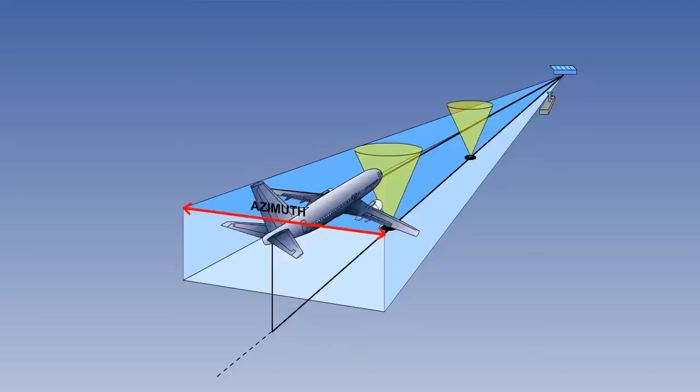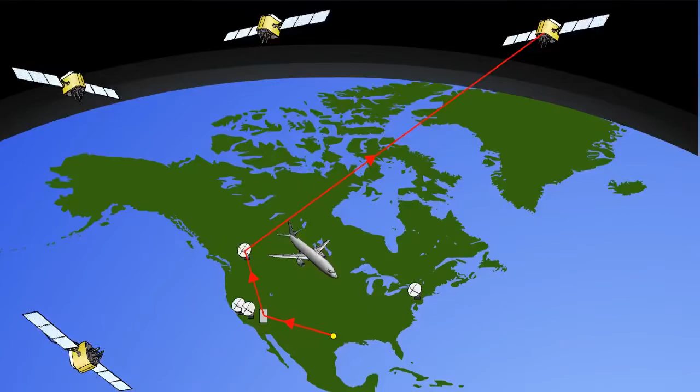The Instrument Landing System, which we will call the ILS, has been in existence since the 1940s, but it is still the most accurate approach and landing aid used regularly by airliners. However, GPS systems, supplemented by ground equipment called Local Area Augmentation Systems, are in advanced stages of research, and no doubt they will be available generally within 10 years. In addition, microwave landing systems avoid many of the problems with ILS.

But our concern in this lesson is the ILS, which provides pilots with an accurate means of carrying out a precision instrument approach to a runway, giving guidance both in the horizontal plane, azimuth, and in the vertical plane, the glide slope.

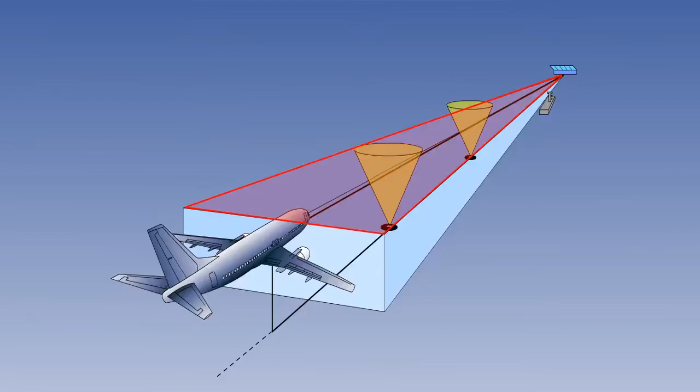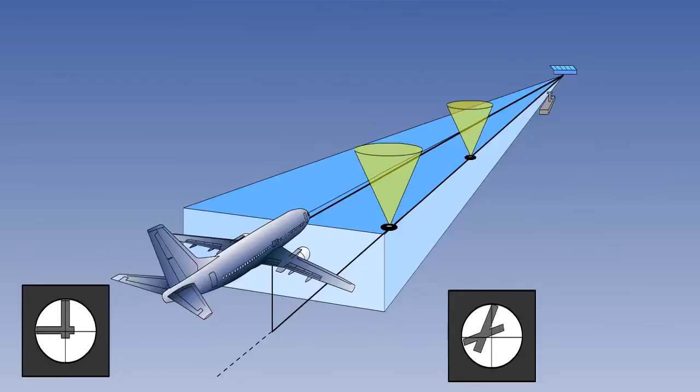The ILS provides the pilot with visual instructions in the cockpit to enable him to fly the aircraft down a predetermined glide slope and extended runway centerline, the localizer, to his decision height or decision altitude. At decision height or decision altitude, the pilot decides to land if he has the required visual references. If he does not, he goes around or overshoots and follows the published missed approach procedure.

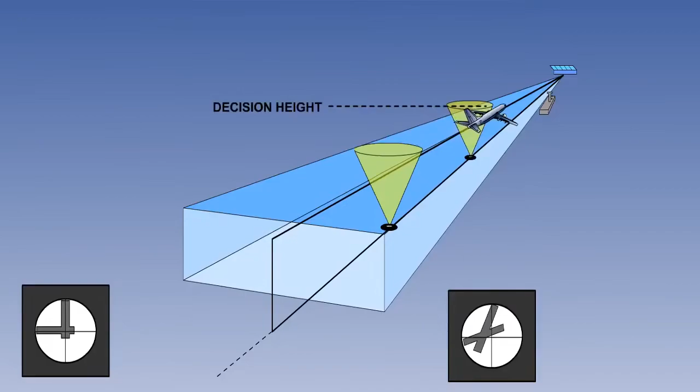There are 3 parts to the ground installation, the first of which is the localizer antenna. This transmits in the VHF band and is located on the extended centerline of the runway at the upwind end. Its signal provides the extended centerline, the localizer, to the approach side of the runway.

The second part is the glide slope antenna, which transmits in the UHF range and is frequency paired with the localizer. It is located about 300 meters in from the threshold and about 120 meters from the runway edge abeam the touchdown point. It consists of 2 rectangular transmitters on a mast. It provides a descent plane at a predetermined angle to the horizontal, normally 3 degrees, according to ICAO. When combined with the localizer, this provides a precise path to fly to the touchdown point.

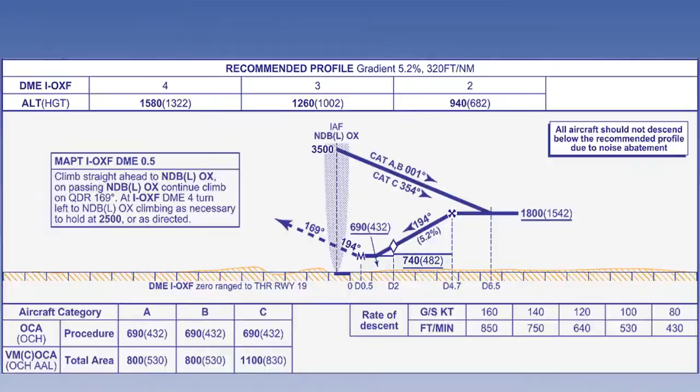The third element of the ILS is a series of 2 or 3 marker beacons on the approach side of the runway. They are designed to give the pilot a cross-check of height against range as he crosses over them during his approach. The distance is shown on the approach plate.

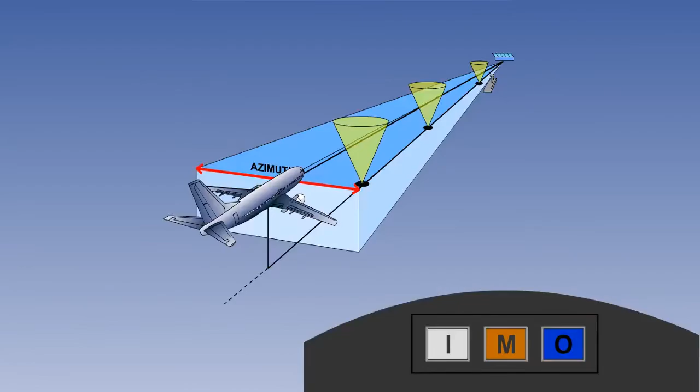Each beacon triggers a different coloured light and audio signal in the cockpit as the aircraft passes over. The outer marker light is blue with 2 dashes per second and denotes a distance of between 11.1 to 6.5 kilometers from the touchdown point.

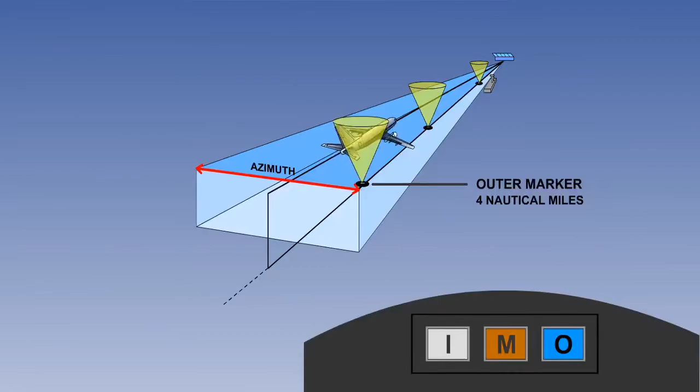The middle marker is amber with alternate dots and dashes at the rate of 3 characters a second and denotes a distance of about 1,050 meters. The inner marker is white with 6 dots a second and denotes between 450 and 75 meters.

Here we see the complete picture.

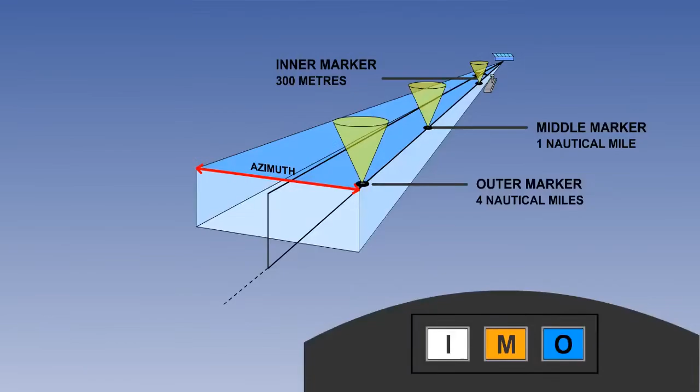Different patterns of transmission are emitted by the markers, so the pilot can tell the difference. They are not directional aids in any way and transmit at 75 MHz, modulated by 400 Hz in the outer marker, 1300 Hz by the middle marker, and 3000 Hz by the inner marker.

These beacons have frequently been replaced by distance measuring equipment, DME, which provides continuing distance readout for the pilot. However, the DME is protected from interference only within the localizer service area of 25 miles and up to 25,000 feet.

When DME equipment is available, it is frequency paired with a localizer when the DME distance is 0 reference to the threshold. It is also used as part of the published departure and arrival procedures, SIDS and STARS, to specify where a maneuver, such as a descent, is to start.

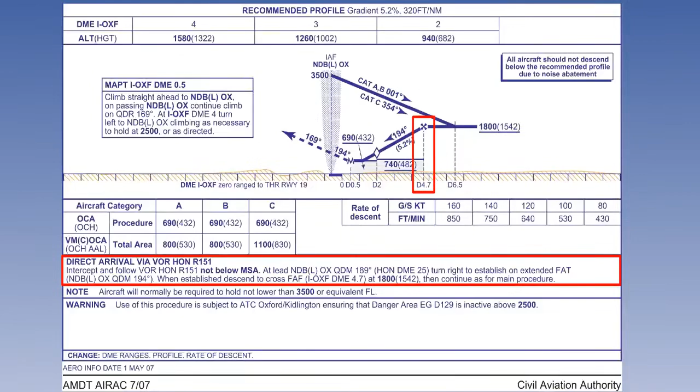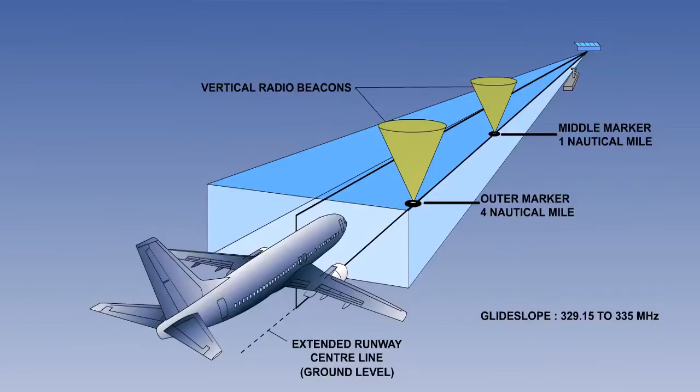Glide slope frequencies are in the UHF band, between 329.15 and 335 MHz, and also provide 40 channels, which are paired with the localizer. This means that the pilot only has to tune to the localizer frequency to also get the glide slope transmission. This saves work and avoids errors. The DME transmission is also frequency paired with the localizer.

The ILS must be identified before use. The ident on the localizer transmission is a 2- or 3-letter group, transmitted at 7 groups a minute, prefixed by the letter I, such as IOXF for Oxford ILS.

Airfields with an ILS are shown on charts and plates with a long paper dart-shaped symbol, and the frequency is shown. Here we see Oxford ILS on 108.35 MHz.

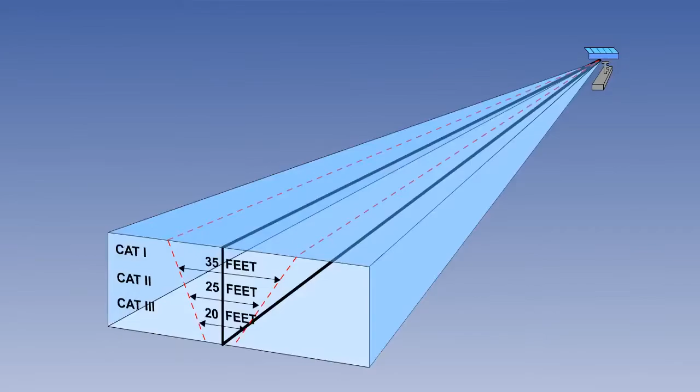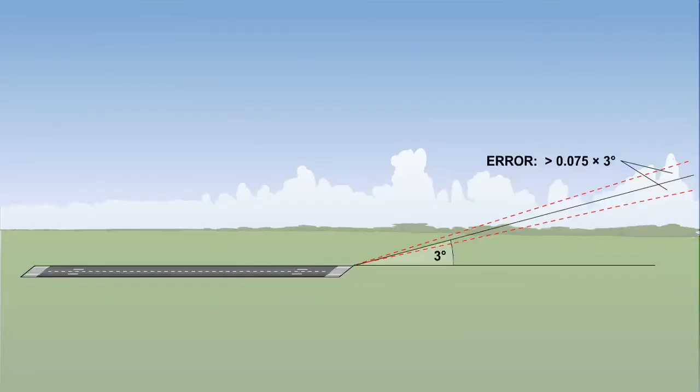If the glide path angle changes by more than 0.075 times the basic glide path angle, or if the power output falls by more than half.

If the ILS becomes unserviceable, the ident is withdrawn. If it is undergoing maintenance or testing, the ident will be withdrawn or replaced by a continuous tone.

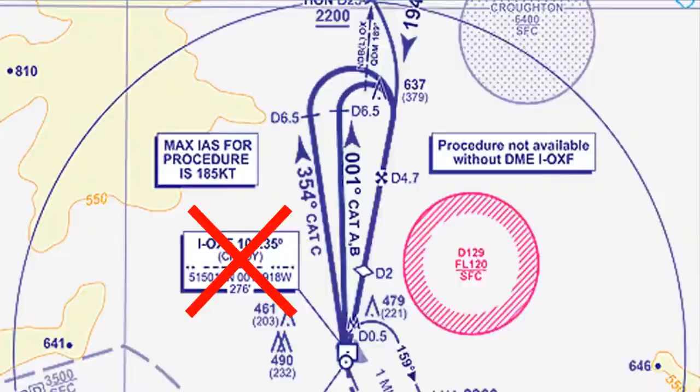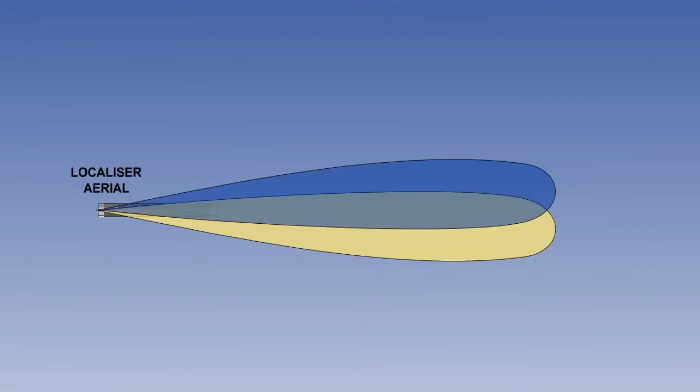The localizer antenna produces 2 overlapping lobes along the runway approach. The lobes are transmitted with horizontal polarity on a single VHF frequency. When looked at by an approaching pilot, the right-hand lobe, the centre of which is directed to the right of

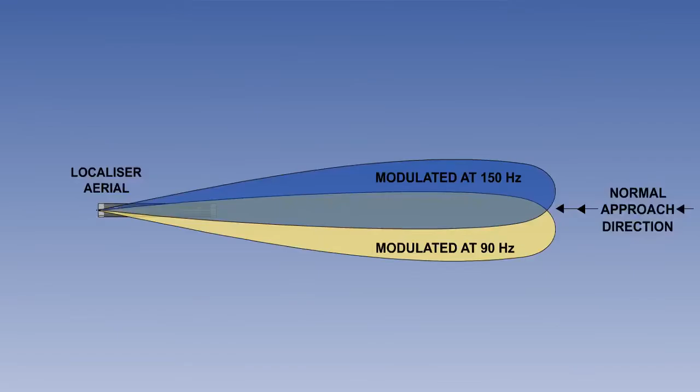the centre line of the runway, is modulated at 150 Hz. The left-hand lobe is modulated at 90 Hz. Where the 2 lobes overlap, this is the extended centreline of the runway.

The depth of modulation increases away from the centreline. That is, the amplitude of the modulating signal increases away from the centreline.

The difference between the depth of modulation of the 2 signals, DDM, is expressed as a percentage. This is done by subtracting the percentage modulation depth of the smaller signal from that of the larger.

For example, the carrier wave is modulated by 15% by the right-hand signal and by 5% by the left-hand signal. The difference is 10% to the right and equates to the angular displacement of the aircraft from the centreline.

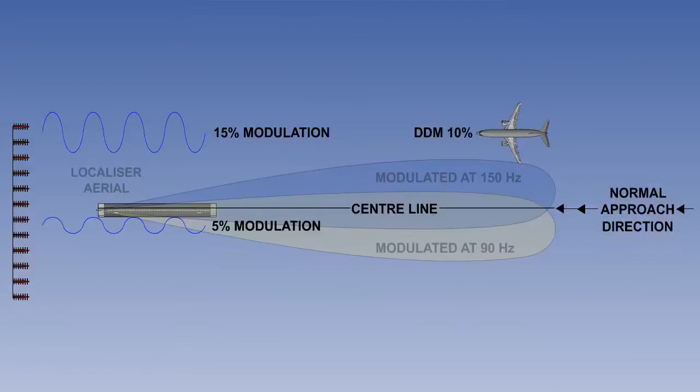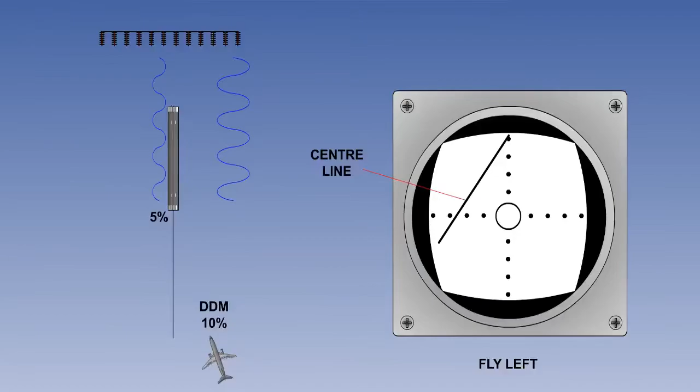This difference in the depth of modulation causes a difference in the electrical signal received by the aircraft. This is represented by a deflection of the ILS needle in the CDI in the opposite direction. As the needle represents the centre of the runway, which is to the left, deflection tells the pilot which way to fly. It is a command instrument.

When the DDM is 0, with both signals having an equal strength, the aircraft is on the centreline.

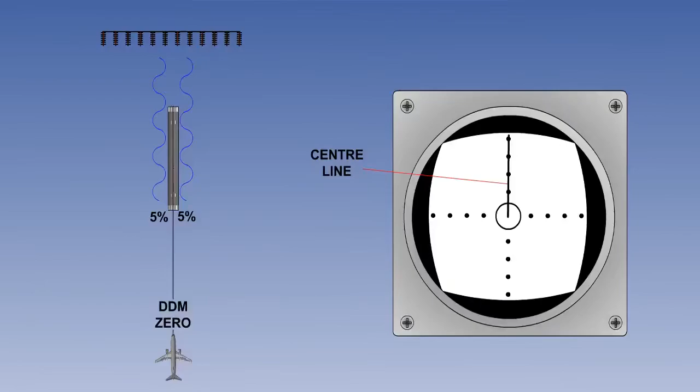Remember that the CDI 5-dot display is very sensitive. Each dot, including the inner circle, represents 1/2 degree, so total deflection is only 2.5 degrees.

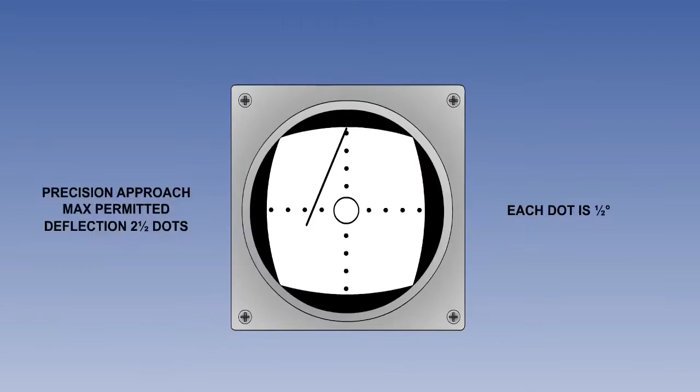The ICAO standard for being considered established, that is, within an acceptable margin of error, is half of this, 1¼ degrees. The descent on the ILS cannot be commenced until established.

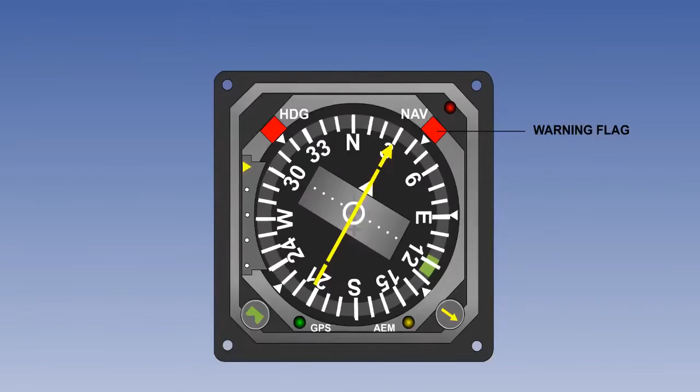Warning flags will appear on the CDI in the absence of the carrier frequency, in the absence of either or both modulations, or if the percentage modulation of either signal is 0.

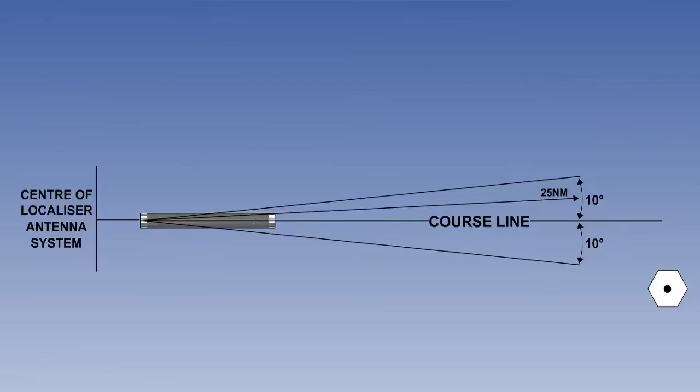The two lobes emitted by the localizer antenna cover a far wider path than the 2½ degrees of the ILS display in the cockpit. In fact, they provide coverage from the center of the localizer antenna to a distance of 25 nautical miles, within plus or minus 10 degrees of the equisignal, the centerline.

They also provide coverage to a distance of 17 nautical miles, between 10 degrees and 35 degrees from the centerline. These figures of 25 and 17 nautical miles can be reduced to 18 and 10 respectively, when other navigation facilities,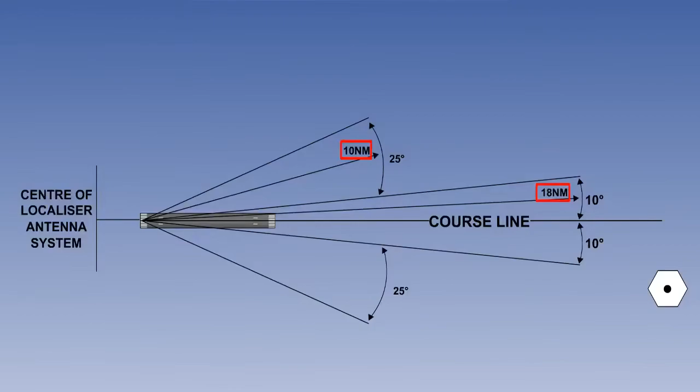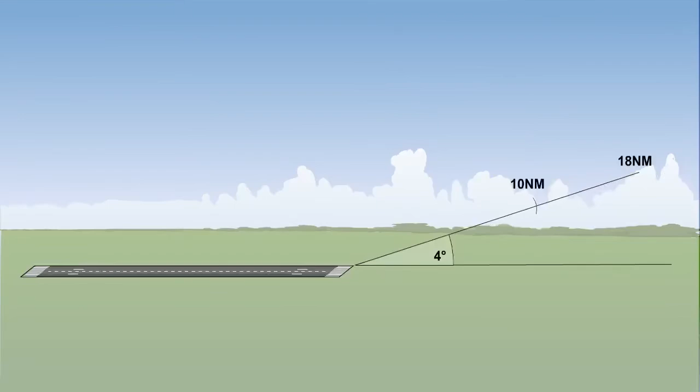such as a VOR, provide satisfactory coverage within the intermediate approach area. The distances are also reduced to the same lower figures where the glide slope is steep, namely where it is 4 degrees or more, as in London City Airport.

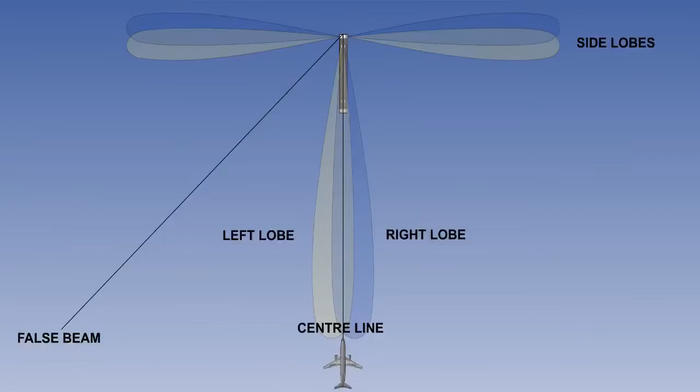Outside of these areas, false beams may be experienced as a result of the radiation of side lobes. The localizer will transmit signals in the reverse direction, back beams, but it is not permitted in the UK to use these in any way, as all the indications are reversed. However, in some countries it is permitted to use this back beam as a non-precision approach.

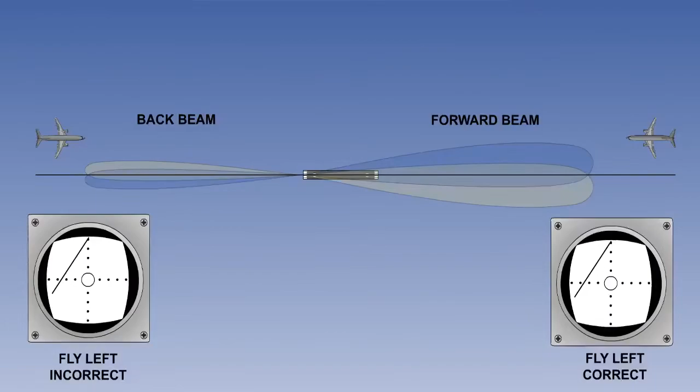There are two glide slope antennae, both mounted on a mast approximately 10 meters tall, positioned some 120 meters from the runway centerline and some 300 meters upwind of the threshold markings, abeam the landing point.

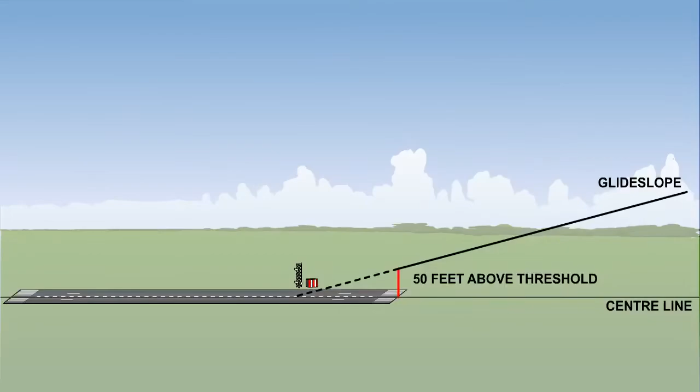The ILS reference datum point is a point at a specified height, usually 50 feet, located vertically above the intersection of the runway centerline and threshold, through which the downward extended portion of the ILS glide slope extends. Remember this when you are asked to do height calculations to the touchdown point, which is 50 feet lower.

The same principle of radio wave propagation is used as for the localizer, but a UHF carrier wave is used, and the lobes overlap one above the other, rather than side by side as in the localizer.

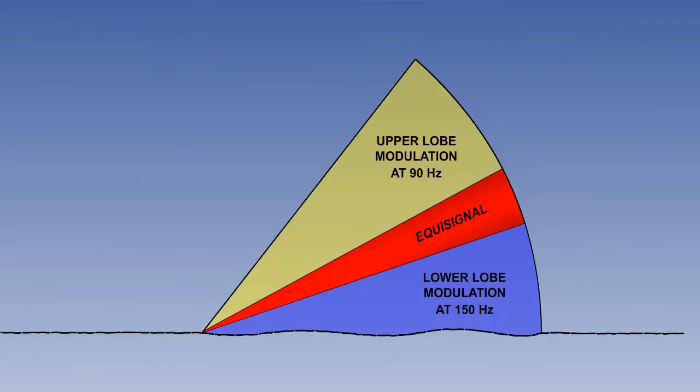The upper lobe has a 90 Hz modulation, and the bottom lobe has a 150 Hz modulation. The ICAO standard glide path is 3 degrees, and this is indicated where the difference of depth modulation of the overlapping lobes is 0.

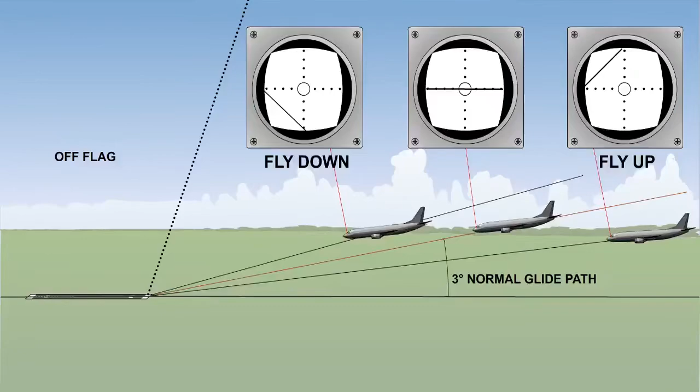The 0 DDM is indicated on the CDI by a needle, which is centered on the horizontal crossbar. If the aircraft is too high, the needle, which represents the glide slope, will be below the horizontal. And if the aircraft is too low, the needle will be above the horizontal.

False glide slopes can exist because the lower lobe lies adjacent to the surface and creates ground-reflected waves. Fortunately, the false glide slopes are all above the true glide slope, at multiples of 3 degrees.

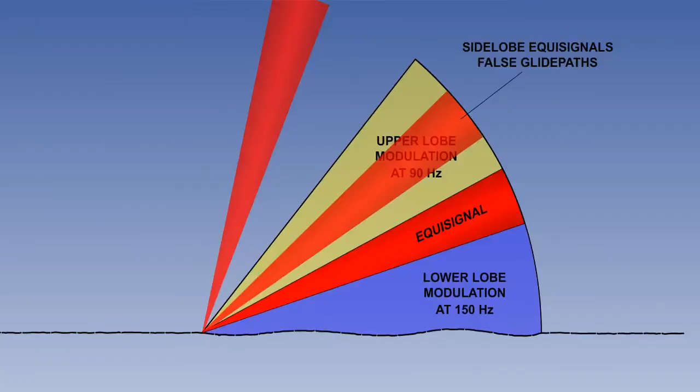The normal practice for intercepting a glide slope is to do so from below. If, during the intercept, a pilot were to see an indication on the CDI that the glide slope was below, he should suspect a false glide slope.

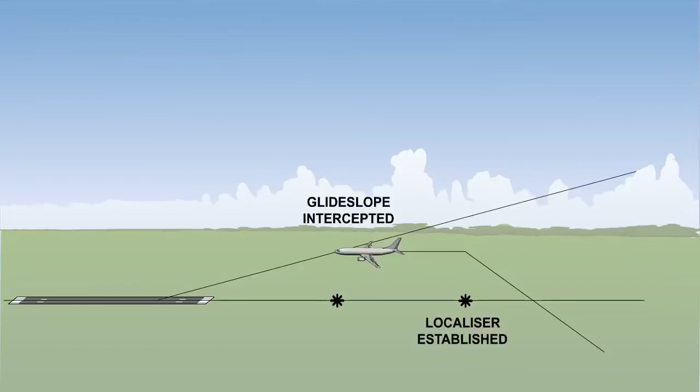Some airports, such as Heathrow, use a continuous descent approach, which allows a glide slope intercept from above.

A 3-degree glide slope increases in height at the rate of 319 feet per nautical mile, although we normally approximate this to 300. So, at 5 miles out, the glide slope should be at 1500 feet. At 10 miles out, approximately 3,000 feet. Check your height with the DME or the final approach fix beacon and check your QNH.

There is another glide path indicator usable in VMC, namely the PAPIs, that is, Precision Approach Path Indicators, which can be used to check the height. These lights are set to the same glide slope angle and reveal 2 white and 2 red lights when the aircraft is exactly on the glide slope.

The glide slope coverage extends from the transmitter to a distance of at least 10 nautical miles, in sectors of 8 degrees in azimuth, either side of the centerline. It is 8 miles for steep glide slopes.

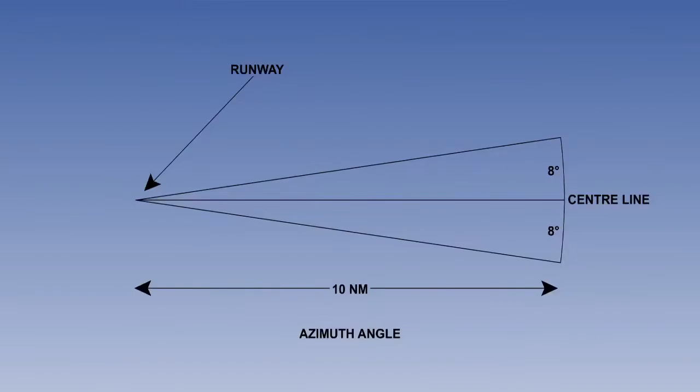Glide slope vertical coverage is required from 0.45 times the glide slope, which is below it, to 1.75 times the glide slope, which is above it. If we apply these figures to a 3-degree glide slope, we see that the vertical coverage is provided through an arc, from 1.35 degrees above the horizontal to 5.25 degrees above the horizontal. This equates to no more than 1.65 degrees below the glide slope and 2.25 degrees above the glide slope.

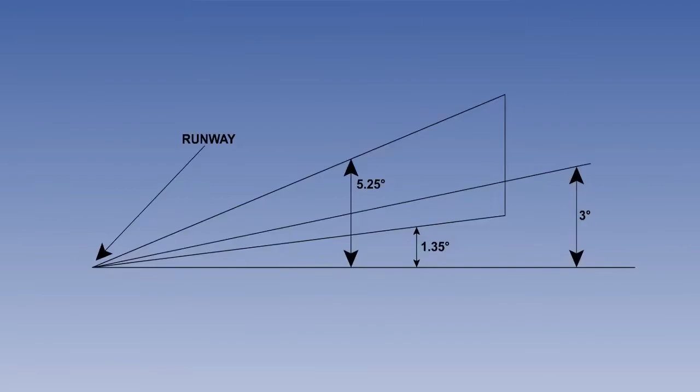So, accurate flying is required.

The glide slope indicator is even more sensitive than the localizer, at 0.14 degrees per dot, so a full-scale deflection is only 0.7 of a degree. Note that maximum safe deviation below the glide slope is half full-scale deflection, 2.5 dots, a mere third of 1 degree.

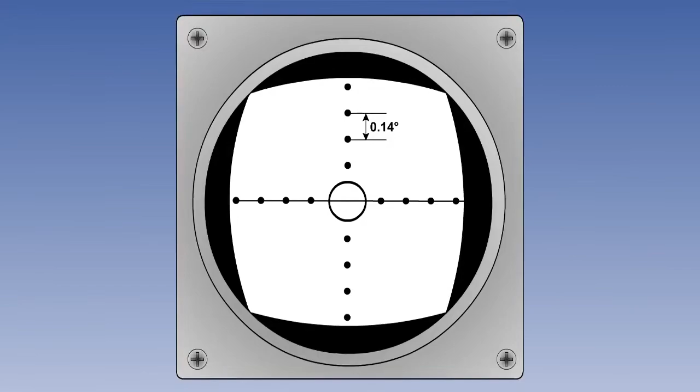In this lesson, we have looked at the components of the ILS system, the frequencies used, the radiation pattern, and coverage of the localizer and glide slope antennae.